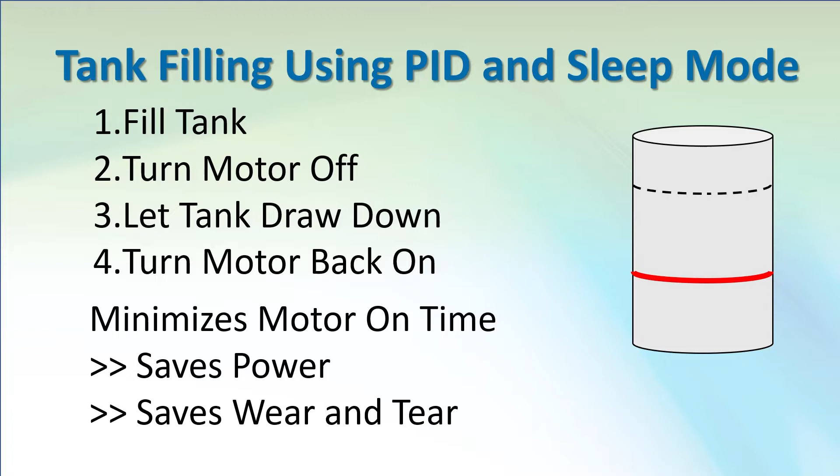We'll do the tank filling example so we can repurpose the hardware we used in the quick start videos. This is the system we used in those videos. The only differences are, we'll turn the valves off and just use this pipe to fill the tank. We don't need a pressure sensor. Instead, we'll use an ultrasonic sensor to detect the water level.

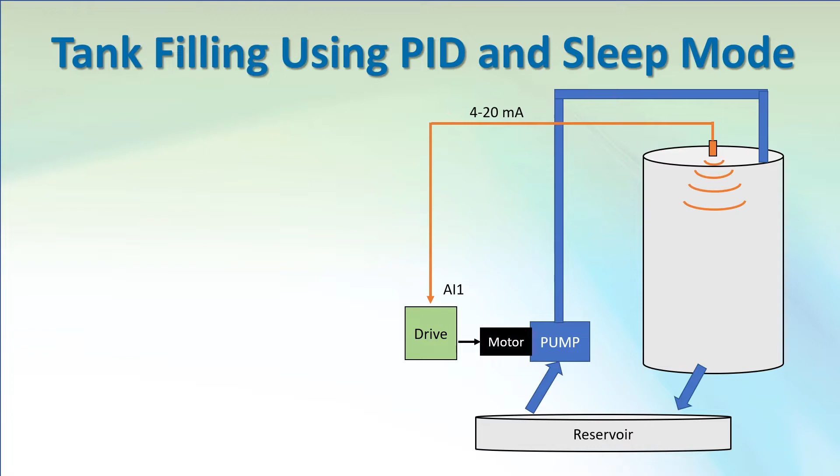The ultrasonic sensor uses a different pin for the signal, so I had to swap signal wires at the drive. And the ultrasonic sensor is a 4 to 20 milliamp sensor, while the pressure sensor was a 0 to 10 volt sensor. So I had to flip this little switch on the I/O module to current and change parameter 233, which we'll cover in a minute.

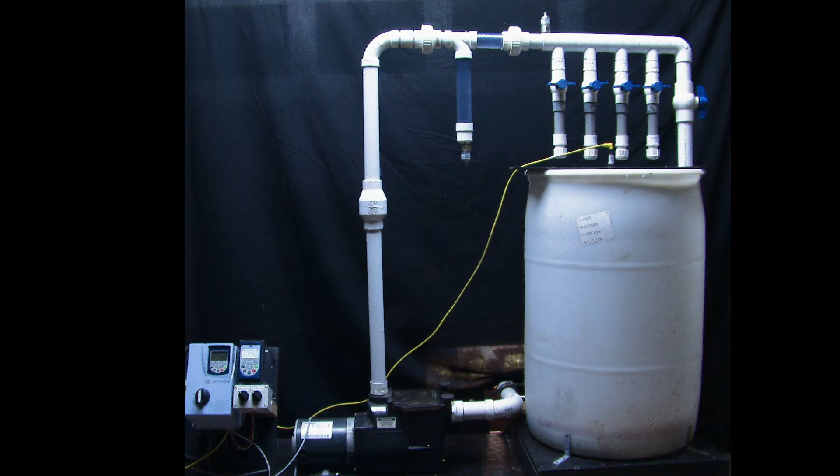Here's the actual hardware. This WEG CFW 500 drive controls this motor, which pumps the water into the tank via this pipe. These valves are closed and this one's opened, so the water flows like this. I'll block out the valves and the pressure sensor to remind us we aren't using them. There's a manual valve on the outlet, so we can change the load by changing how fast the water leaves the tank.

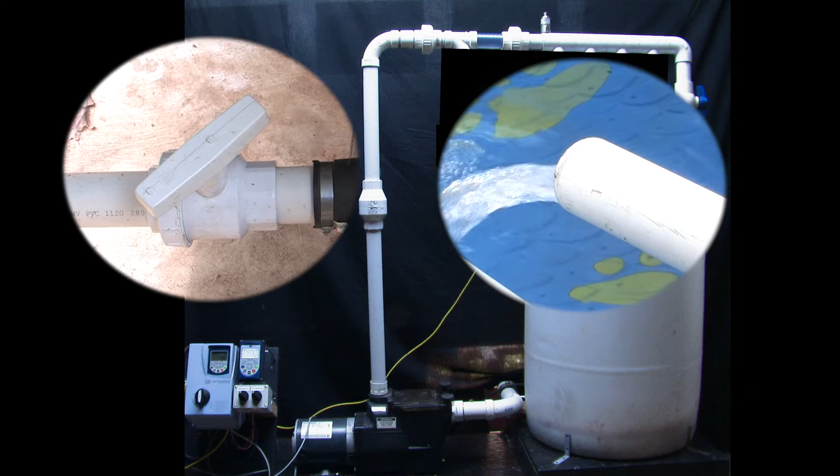I also added a styrofoam disc with LEDs on it to make it easier for you to see the water level, and I just mounted the ultrasonic sensor on a board that I laid across the top of the tank so I could look down and see the styrofoam LED disc floating on top of the water. I configured the ultrasonic sensor to give me a large reading up here and a small reading down here so we can measure how full the tank is. 0% full or 100% full, for example.

We're using the same switches as in the previous videos, and we'll use the remote HMI again because it does a much better job of showing us the things we need to see. I'll rearrange the screen to make it easier for you to see the drive's HMI, control switches, and tank.

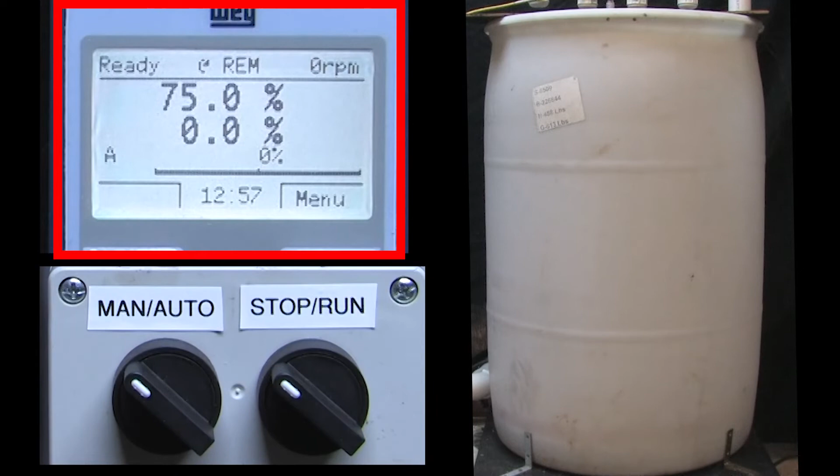This is the PID configuration we used in the CFW 500 Soft PLC internal PID video. We'll use that version of PID because I just finished that video and everything's still set up, and I just like the way the Soft PLC version shows all the information on the remote HMI. Now everything we do here will apply directly to the drive's built-in PID, you just use different parameter numbers. I'll give you a cross-reference list at the end of this video that shows you how to convert everything we do here to the drive's built-in PID.

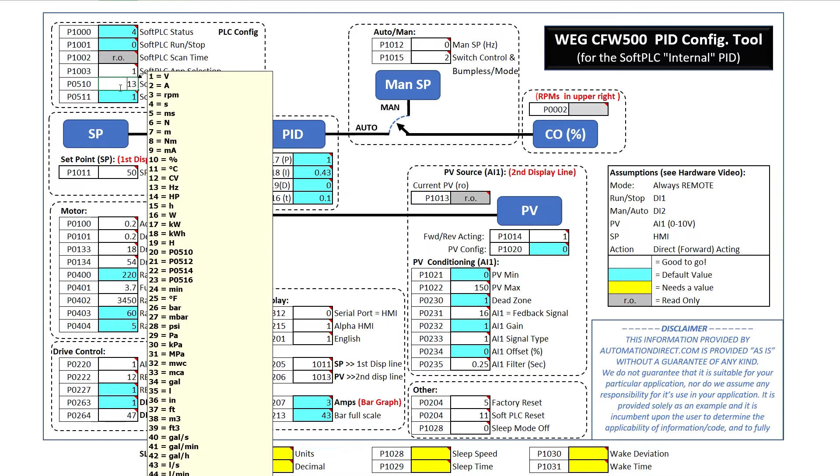And we only need to change a couple things. Parameter 233 needs to be changed to 4 to 20 milliamps to match the ultrasonic sensor. Since we'll be measuring the fill level of the tank in percent, we need to change our PID units to percent in parameter 510. PV min and PV max need to be 0 to 100%. I also modified the PID coefficients for tank filling. I'll explain why and how I did that at the end of this video for anyone that's curious. Let's highlight everything we changed in red to make it easier for you to see the differences.

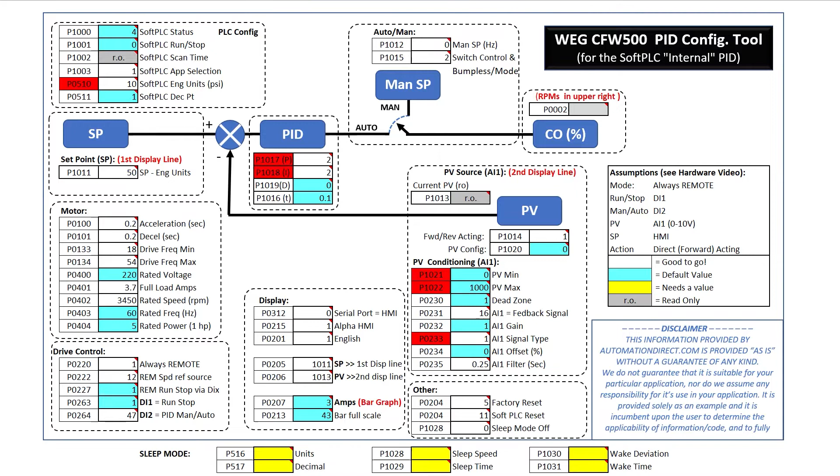I put the sleep mode related parameters down here. We need to make sure the sleep mode units in parameter 516 is set to Hertz or RPM. You can't use anything else. We'll use RPM. And parameter 517 has to be set to 0 decimal places when using RPM units. If you use Hertz, you have to use a single decimal place.

Now, one side note. This is the firmware version of the drive I'm using. In that version, even though you set parameter 517 to 0 decimal places, the display shows parameter 1028 as having 1 decimal place. So this is really 1500, not 150, for example. Now that'll probably be fixed by the time you see this video. WEG is very responsive to things like this, but just be aware if you have an older firmware version like I do.

To enable sleep mode, we need to put a motor speed here. Let's say we want to fill the tank to this level. Well, that's our set point. When PID sees the water's way down here, we get a large difference between where we want to be and where the water is. That is, we get a large difference between the desired set point and the process variable. PID responds by going to the max motor speed.

As the water level rises and gets close to the set point, PID backs off on the motor speed all the way to whatever speed is required to maintain this level. Now that speed will change depending on how fast the water is being pulled from the tank. In tank filling applications like this, most of the time we don't want to maintain the water level.

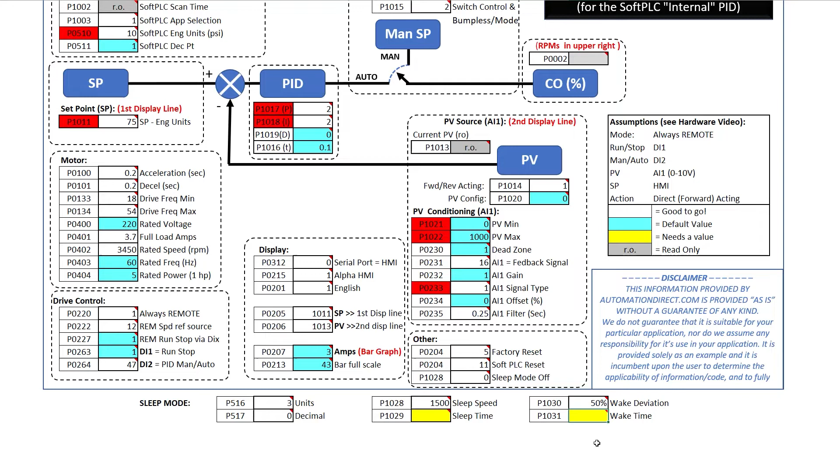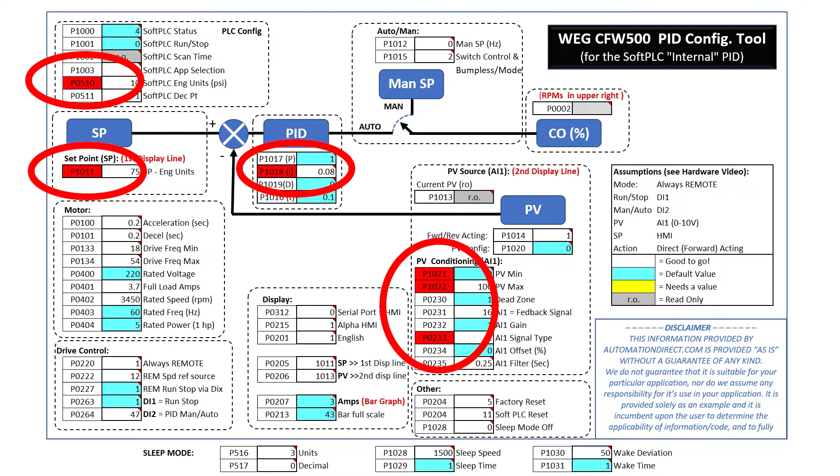The delay times allow you to add hysteresis if you have a messy process and don't want intermittent waves or splashes or bubbles to trigger Sleep Mode. We don't really have a need for delays in this video, so we'll make both of those 1 second just so we can see how it works without extending the video too much. So, all we did was change a couple things up here and add the 4 Sleep Mode parameters. Not bad at all. I already entered all those parameters into the drive. We see our 75% full set point here, for example.

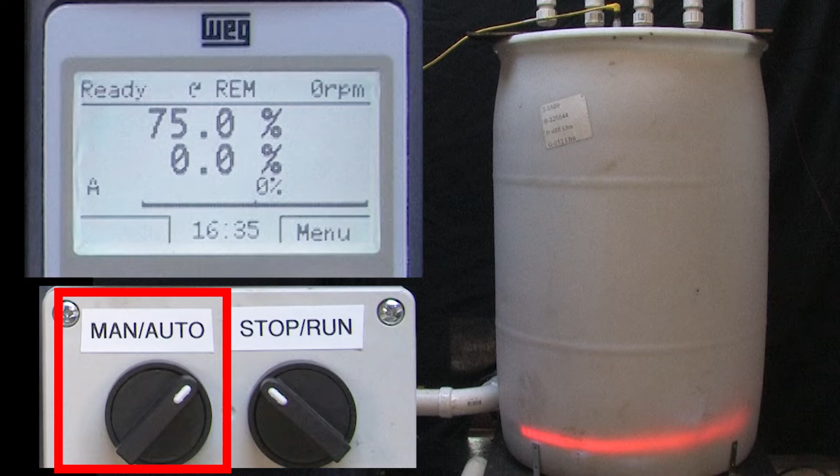And let's turn the water level LEDs on to make it easier for you to see the water level. In the Soft PLC internal PID video, we found that these were labeled for the drive's built-in PID, and that the Soft PLC's version we're using uses the opposite contact state. I'll mark them like this to remind us of that. Let's switch to auto mode and switch to run. PID sees a big difference here, bigger than the 50% we asked for, so it starts to automatically fill the tank. We see the water level LEDs rise and the actual sensor feedback over here on the HMI display.

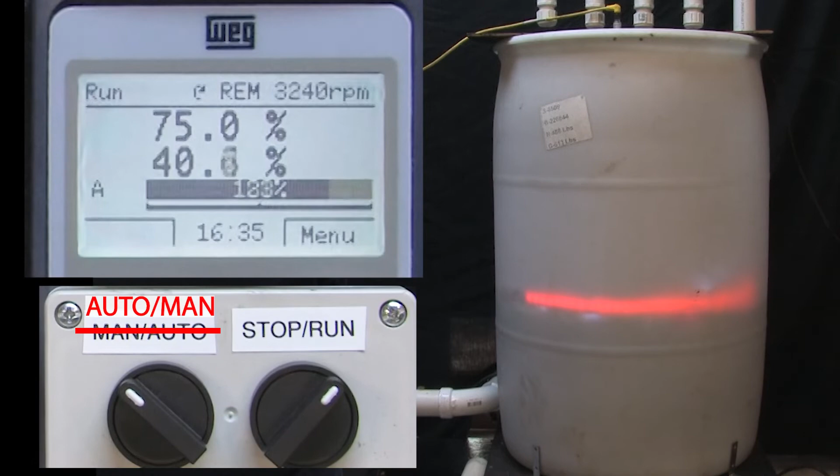Notice on this initial fill, the output current's going a little nuts, and if you listen to the audio, you can hear the system oscillating. That's caused by the PID coefficients we're using. We'll take a closer look at why that's happening at the end of this video. Now remember, Sleep Mode isn't watching this level. It's watching the motor speed, and it's waiting for it to drop to the 1500 RPM we entered. And you can see as the water level approaches the 75% set point, PID starts to slow the motor down.

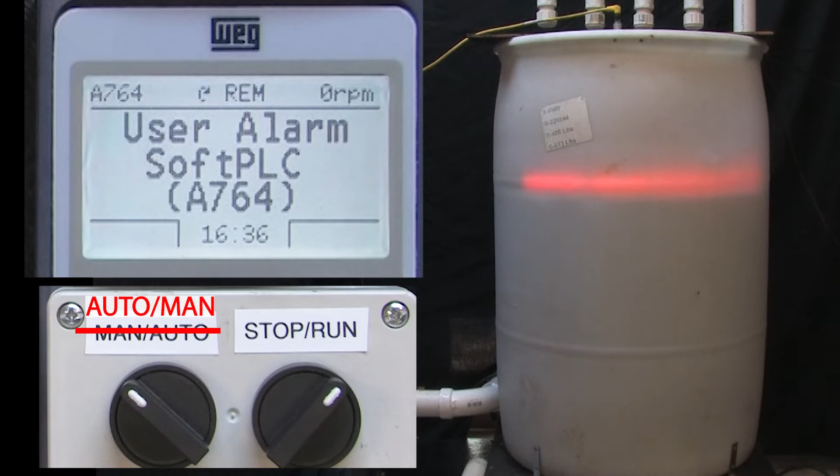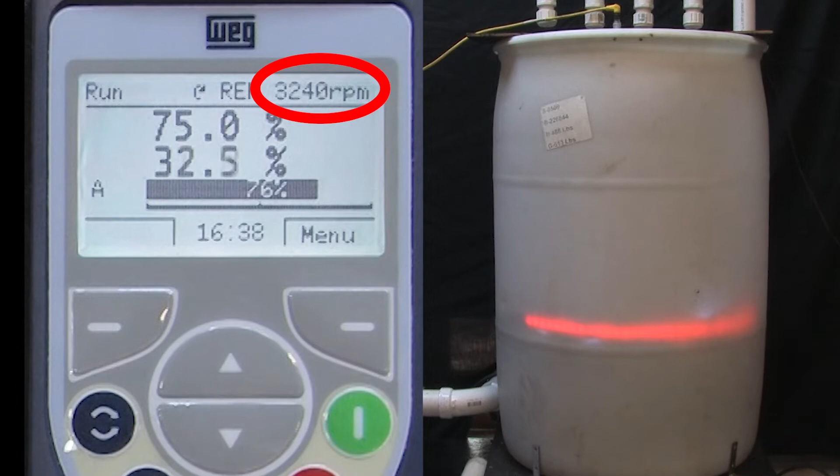When the motor speed gets down to 1500 RPM, it waits 1 second and then puts PID to sleep, which stops the motor. We get this alarm message telling us Sleep Mode is active. That alarm's important because Sleep Mode can re-engage PID at any time without warning. I'll open the tank's drain valve to give us a medium load. The water level drops. That'll take a couple minutes, so I'll fast forward the video so you don't have to wait. And when it drops 50% below the set point, Sleep Mode waits the 1 second delay we gave it, clears the alarm, enables PID, which cranks up the motor speed to the max to try and overcome the huge difference. We see the tank filling.

Okay, the water level is getting close, and we see PID starting to back off on the motor speed. When the motor speed hits 1500 RPM, Sleep Mode waits the 1 second delay we asked for, and then disables PID. And we get the Sleep Mode alarm again. I'll fast forward through a few cycles so you can see it do its thing.

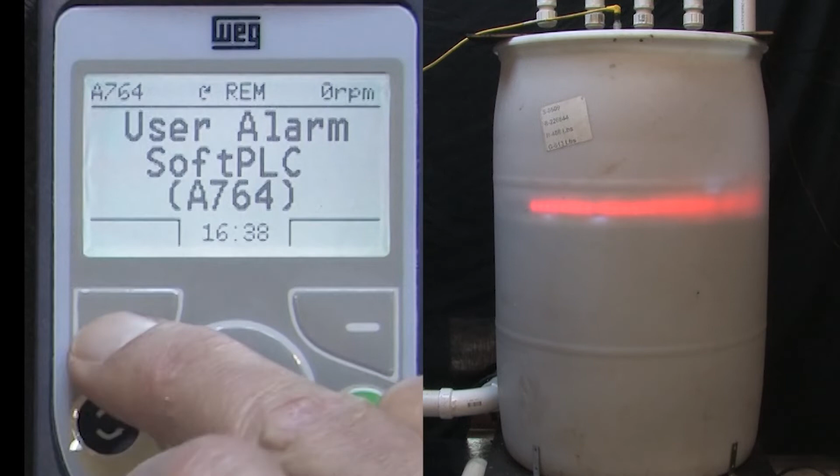So how cool is that? The drive is automatically filling the tank for us without the need for an external PLC to monitor the process and enable or disable the drive, which saves you time, effort, and panel real estate. Sleep Mode allows the drive to do it by itself for free. And all we had to do was change a couple PID parameters and enter the 4 new parameters for Sleep Mode. Not bad at all.

And if we use the drive's built-in PID function, not the Soft PLC's internal PID that we're using here, we can free up the drive's Soft PLC. To do that, just switch to the drive's built-in PID. This video shows you how to set that up, and use the drive Sleep Mode parameters instead of the Soft PLC Sleep Mode parameters. Other than that, it works exactly the same way. Well, that ought to be enough to get you started with Sleep Mode.

If you want to know why I chose the PID coefficient parameters we used here, well, this section's for you. Tank filling is a different kind of PID process. When you're trying to maintain something like the pressure in a system, for example, eventually the pressure levels off for a given motor speed. If you increase the motor speed, well, the pressure increases and levels off someplace else. In tank filling, the tank just keeps filling. It doesn't reach some level and stop. And increasing the motor speed just fills it faster. Again, never leveling off. Tank filling is called an integrating PID process, and it needs to be tuned differently.

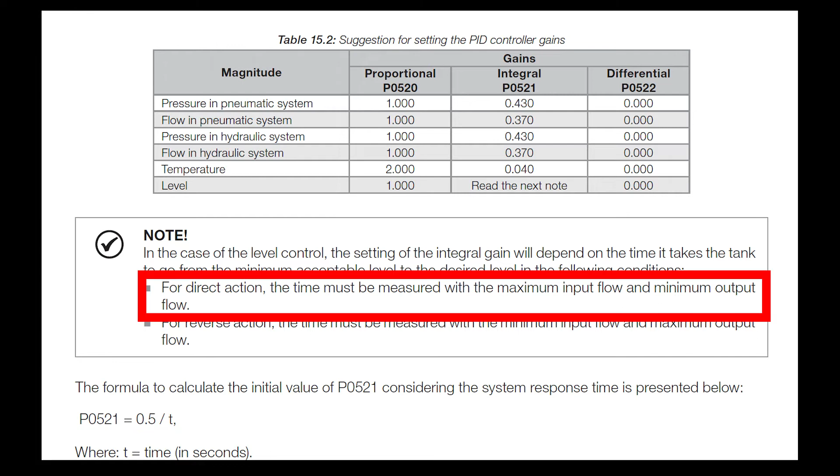If you want to learn more about that, then check out this series of videos on the GS4 family of drives. It's a different drive family, but the methods used to tune a tank filling PID loop apply exactly the same to any drive. Now for this video, I just went to the table in the user manual with the recommended PID coefficients for different types of applications. And I saw that for tank filling PID, there's a special note, which says for forward or direct acting systems, measure the fastest time it takes to fill the tank. For this demo, that would be from 25 to 75% with the output valve closed. And divide 0.5 by that time.

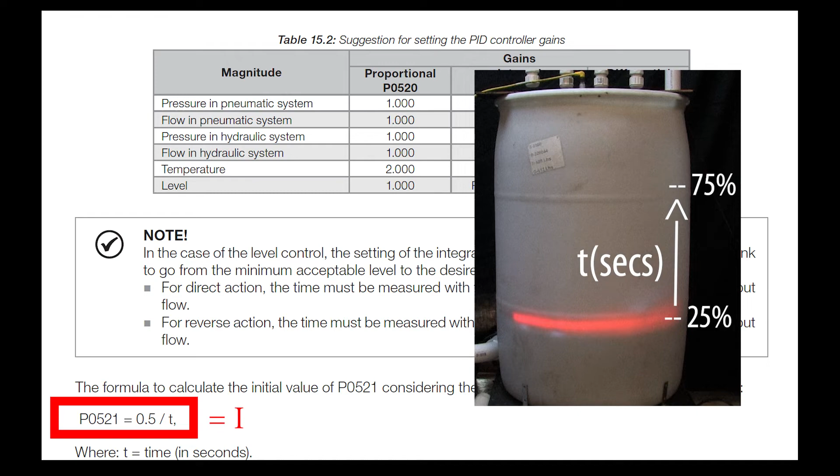Now when I tried that, PID stopped filling the tank way below the 75% I wanted. I would have gotten there eventually, but when the motor speed fell below the 1500 RPM we set to protect the pump, sleep mode put the system to sleep. Again, sleep mode doesn't care about the tank level. It only cares about the motor speed. So I kept increasing the I coefficient until I got close to 75% fill level. And that's how I came up with the 0.08 coefficient we used here.

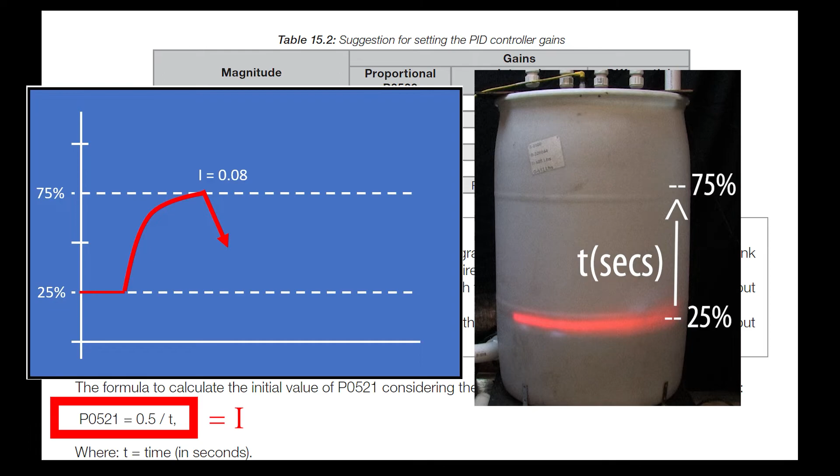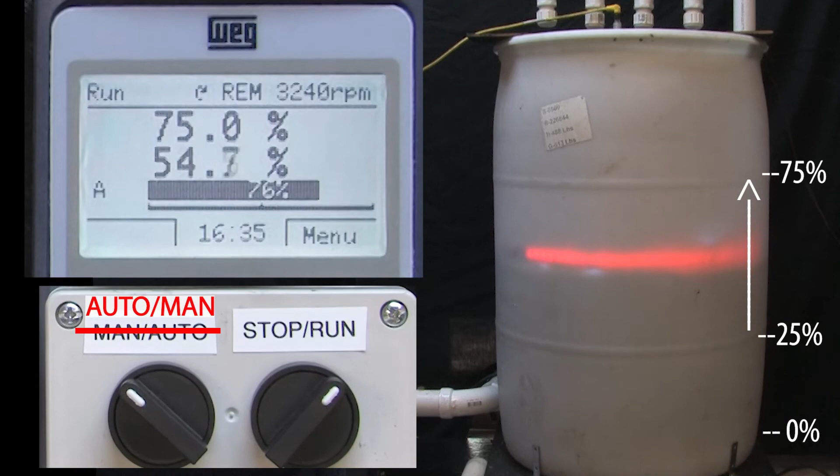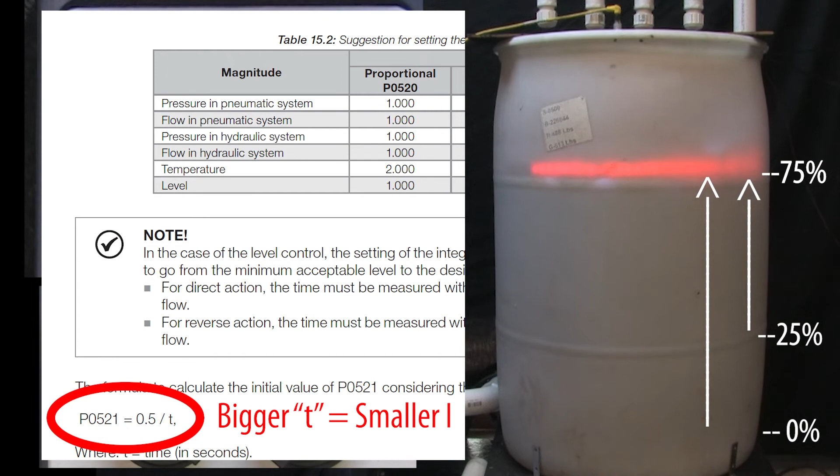But remember when we first started filling the tank at the beginning of the video? The output current went a little crazy and we could hear the system oscillating. What happened? Well, when the tank filling operation oscillates like that, it means the I coefficient is too large. Remember, we set the I coefficient to get the tank from 25 to 75%. But when we first started out, we had a larger distance to go, which takes more time. And according to our formula, we needed a smaller I coefficient. But because I knew that most of the time I'd be filling the tank from 25 to 75%, I left the I coefficient at the aggressive value, which was also the value that got me to 75%.

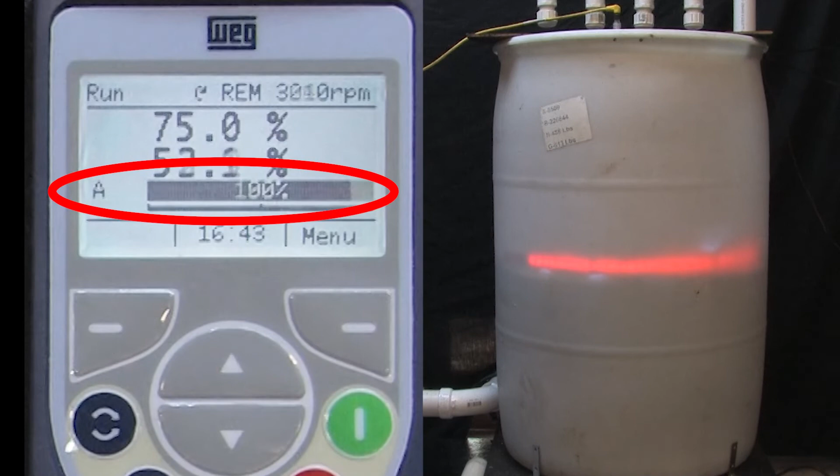Let's try that. I'll double the I coefficient and save it. Fast forward to the rest of the cycle. This time when the tank fills, you can see the current going nuts after the I term is integrated up, and you can hear the system oscillating. And if we wait for it, yep, the tank filled past the 75% value. Another indication that I was too big. Now why did it do that? Well, PID was too aggressive, so the level was going to overshoot. And when PID slowed the motor down to compensate, sleep mode saw the motor speed drop below the 1500 RPM and put the system to sleep. Again, sleep mode monitors the motor speed, not the tank level.

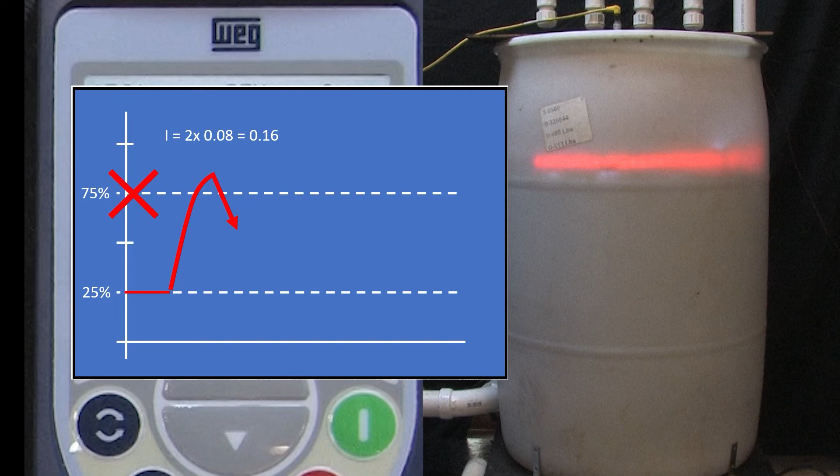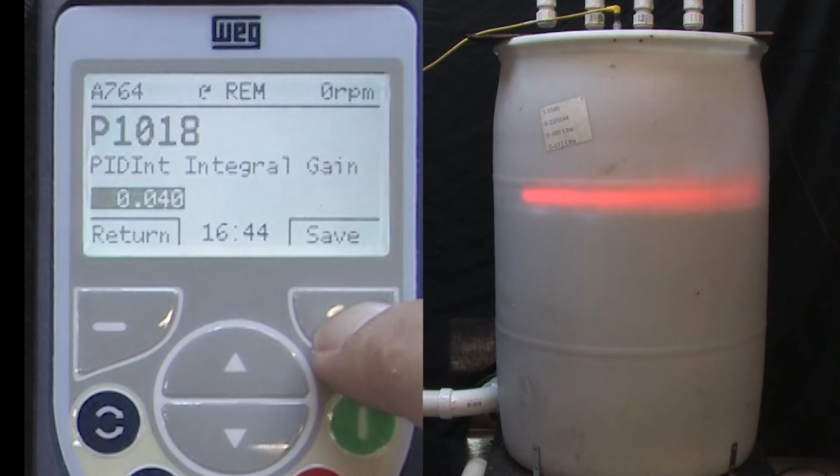Let's do the other extreme. While the tank's draining, let's cut the original 0.08 value for the I coefficient in half to 0.04. Save it, and I'll fast forward to the cycle. Well, the system didn't oscillate, but it also doesn't reach the 75% fill mark before going to sleep. Again, that tells us that I was too small. Now it would have gotten to 75% eventually, but because sleep mode is watching the speed of the motor, and PID slowed the motor to below the 1500 RPM we set to protect the pump, sleep mode put the system to sleep. Hopefully that'll give you some insight into how to set up the I coefficient of the PID algorithm when doing a tank filling application.